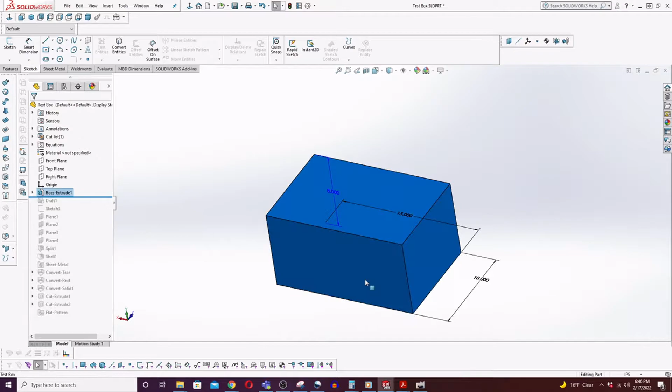So the first method I used was with a 3D solid that's been converted into a sheet metal part, and I'm just going to show you in this part how to do that. What I started with was a box, just a standard extrude. I picked some basic dimensions, 10 by 15 by 8. I drafted those faces on the side to create the prism feature, and then I created a sketch and some planes at the corners so that I could intersect the edges, intersect with those vertices, and then split away all those corners to create the prism.

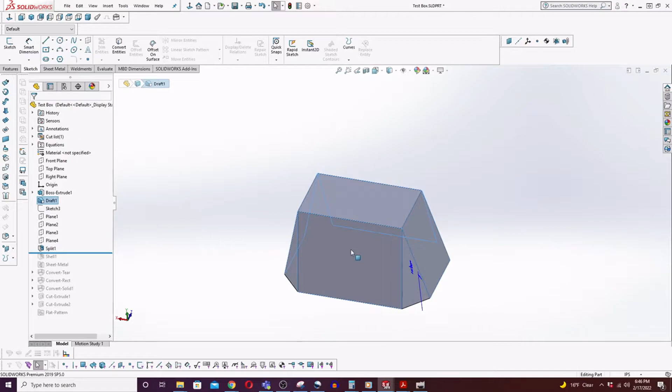Now, something to be aware of is that when you do a draft, you can select the draft out of the tree and double-click it to get to the edit of the angle. But what you can't do is select the drafted faces to edit the angle. So if you want to create drafted faces that you want to edit, maybe the offset, not so much the angle, such as controlling the distance here horizontally from this lower edge, then you'd want to do an extrude cut instead.

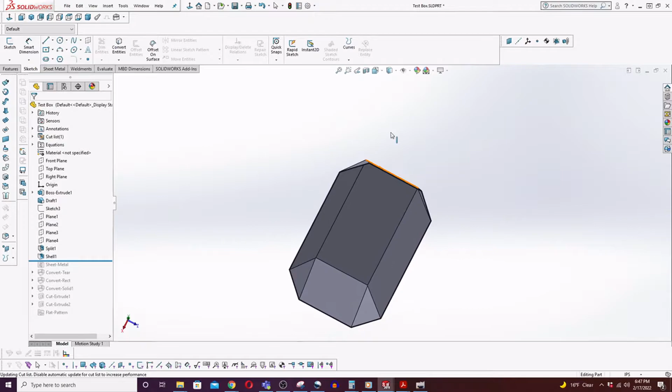Then I shelled it, and I only shelled it because I like to make sure that my models that I convert from 3D to sheet metal actually look somewhat like sheet metal parts before I actually convert them. Technically, I wouldn't have to do the shell, I could just leave it alone. And then I do my sheet metal conversion.

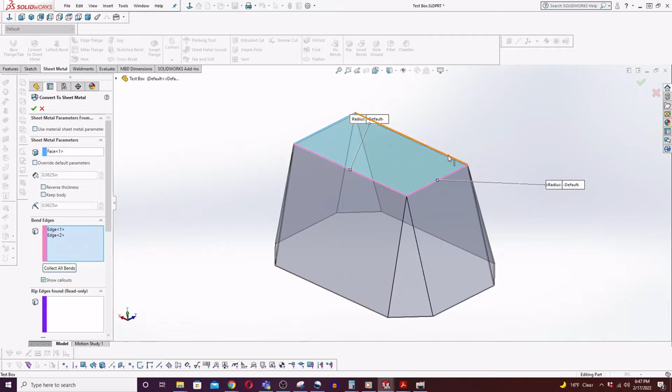Now, in this particular part, I haven't done it yet, so I just come over to the sheet metal workbench, convert to sheet metal, and you grab your top surface that's fixed, and then you come in and grab your bend edges. In this case, it'd be all the top edges. You want to make sure. Now, the downside to shelling it is if I accidentally grab the inside edge, it'll give me an error, so you've got to make sure that all your external edges are selected.

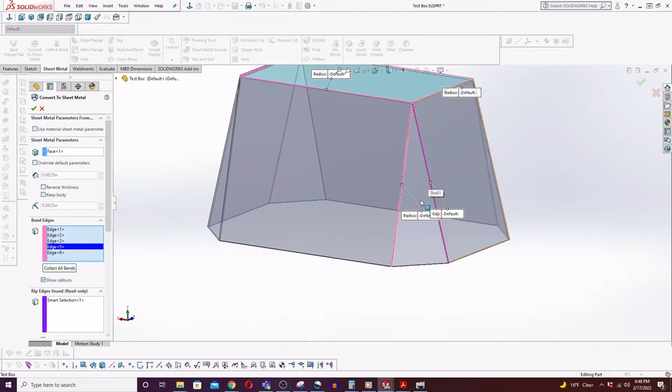And then from there, I have to make a decision: am I going to use the side flange for my bend for the triangle, or am I going to use my end flange? So I'll show you both. Automatically, SolidWorks identifies that there is an exclusivity here where this edge cannot be included as a radius. It's a gap, so that's going to be your rip edge, and it's populated in my rip edges down here.

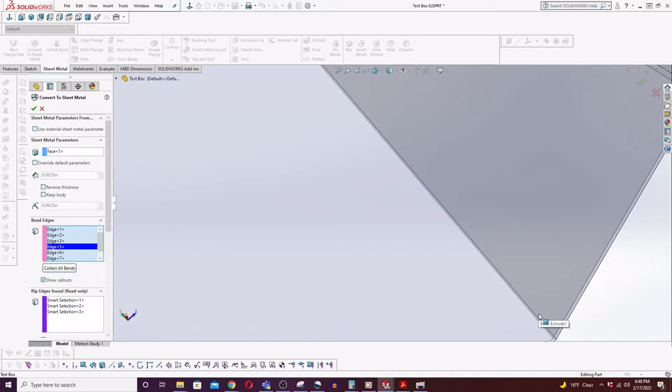So continue to move around. On this side, I'm going to do it where I've got the side flange. Here I'm going to go ahead and grab my end flange to be my bent feature. And then from here, obviously all the surfaces highlight. From this point, I can actually come in here and control a few other features, like the gap on my corner defaults.

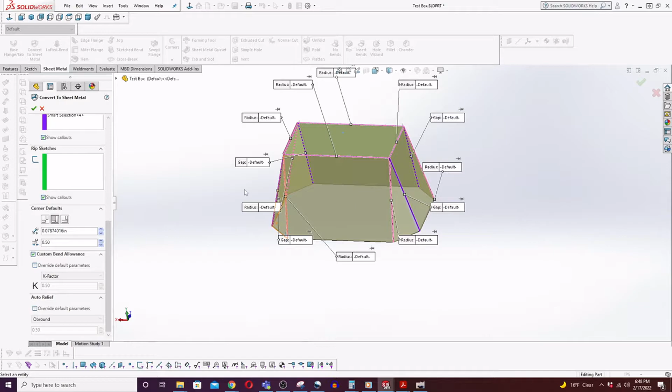If these were 90-degree bends, then I could start playing around with my overlaps and underlaps. The only reason I'm not going to do that here is because what will happen is it'll actually extend my sheet metal part past, and it probably won't preview it for me. Oh, there it goes. It shows me. There it goes.

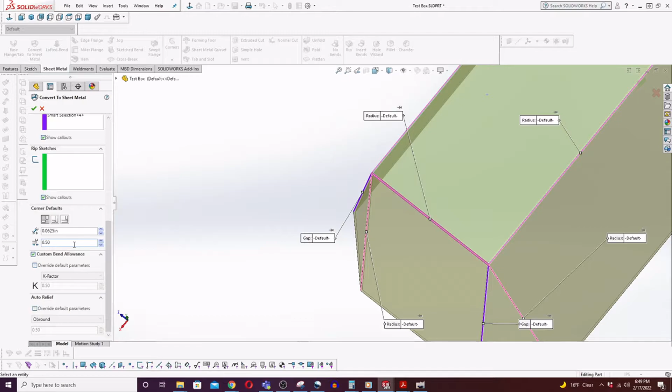It gives me a preview there where it's funky, it's overlapping pretty bad. So I'll just do the open butt joint, and then I'll give it a distance. This is basically 2 millimeters, but I can also just do the thickness of the sheet metal. The gap, I like to use either the thickness of the sheet metal or roughly half.

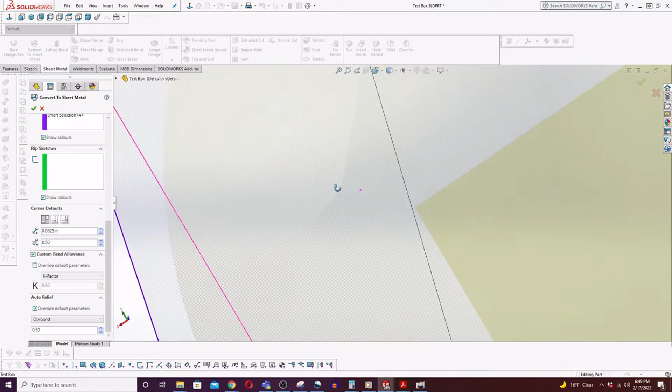And then my overlap, that's up to the individual engineer or designer. I'm going to override my default parameters for my relief. If I do an Obround, I get this nice curved feature in the corner. Problem is, if you rotate in here, you can actually see a little bit where the corner, ever so faintly, the bend radii actually interfere.

And it's because of the nature of how we're developing this model, where it's got 75-degree bends instead of 90-degree bends. I could play around with it. There's actually a lot of different ways to fix this, but changing this ratio doesn't really fix it.

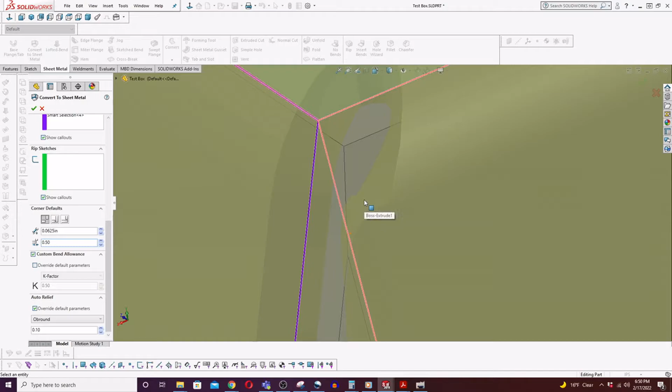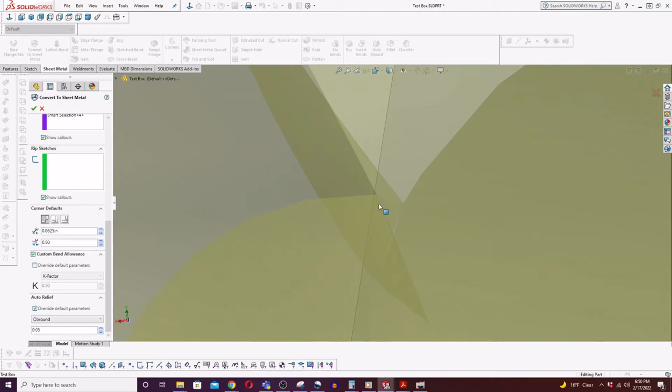You can bring it all the way down to 0.1, and even then you'll see it brings it back, but it doesn't fix it. It still leaves just a little bit of interference in that bend. Even if I were to do 0.01, 0.05, I should have known that. So 0.05, and I still have an issue where the bend radii are touching each other. And ultimately, I'll just bring this back up to 0.5, and I'll get this error.

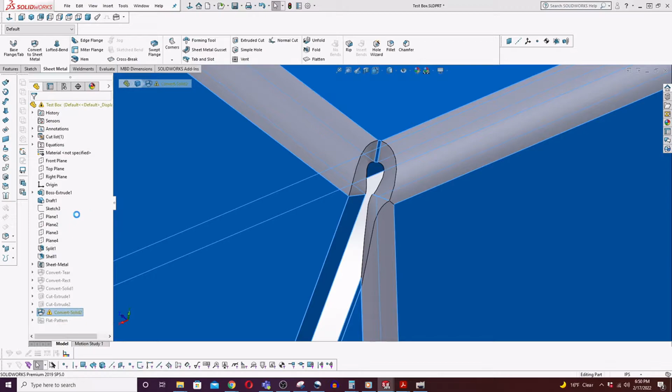And it's just telling me that the bend faces are fused together. It's not the end of the world. I actually can show you how I did fix it, so where the model does work. Or what you can do is come in here, and I've built 3 different versions of this configuration with an Obround, a rectangle, and a tear.

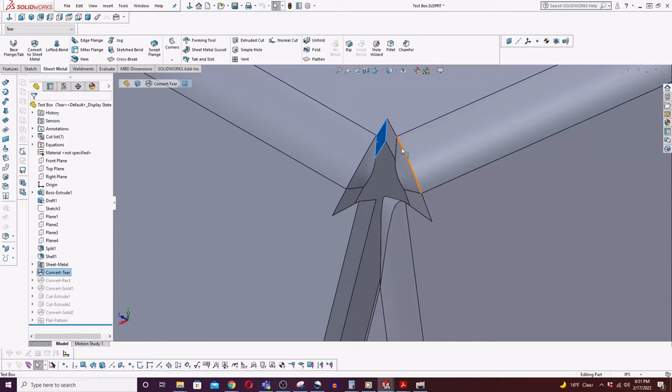So if I do a tear, what happens is it actually rips apart the sheet metal, and for whatever reason Solidworks doesn't have enough complexity built into this feature to know to put a radius in these corners or anything like that. You can go into the model and create little base flange tabs where you finish out these features, but that becomes pretty time consuming. You get a very similar type of corner feature with the rectangular. It's just a little bit less pronounced, but same issue.

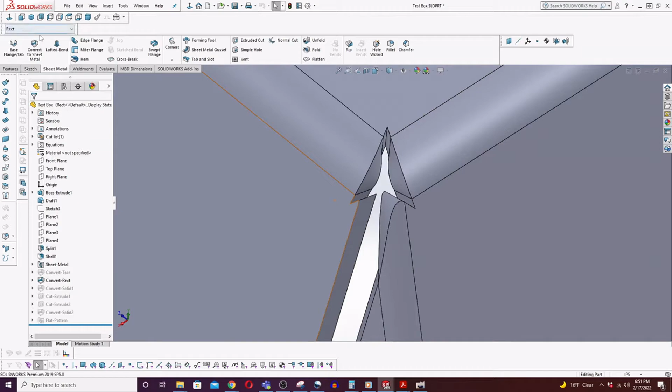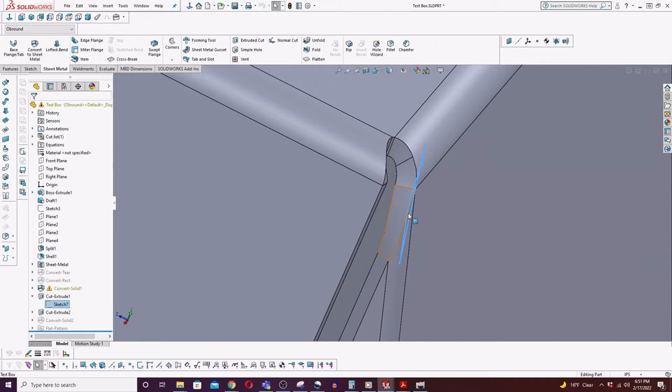And then if you do the Obround, one way that you fix it is you do a cut feature where you come in and actually project the geometry of the interfering bends, and then extrude them past and leave behind the other faces. And then now, at least by doing it this way, I can flatten my part. Otherwise, I wouldn't be able to.

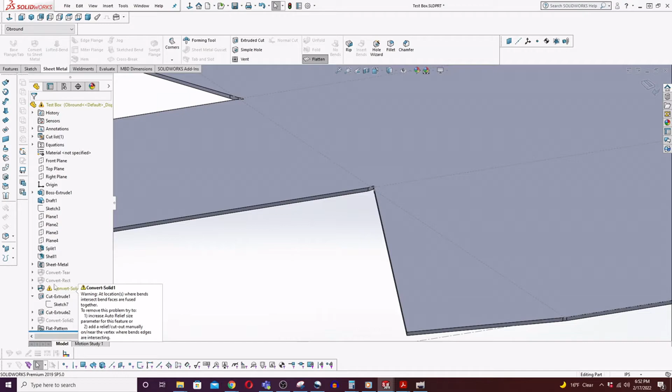Now, the warning still exists. Notice it's a warning, not an actual failure. It's just telling you, hey, it can cause problems. So from there, that's one way to create a part like this.

The only thing I don't like about this is whenever you select on a converted solid and try to edit the underlying features, you can't. It'll just kick you back to the conversion level. Everything before that is inaccessible from the 3D space. You have to go back to the tree to select it.

So if you have a bunch of different drafts, or a bunch of different features like holes and things like that, you don't want to put those in until you've converted it to sheet metal, which can be a problem. I prefer to build it directly as a sheet metal part.

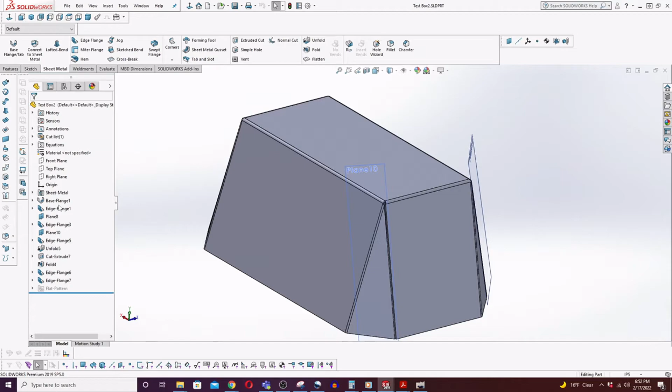And a sheet metal part, I've done it a couple different ways. First off, I start with the flat base flange, and then I did an edge flange. Here, they're all just at 75 degrees. It's the same length, and then what I did was make sure that the flange position is set to intersect, bending from a virtual sharp.

And the reason is because I want to make sure that the outside faces, the intersection of those faces, is the same as the dimensions of the original flat.

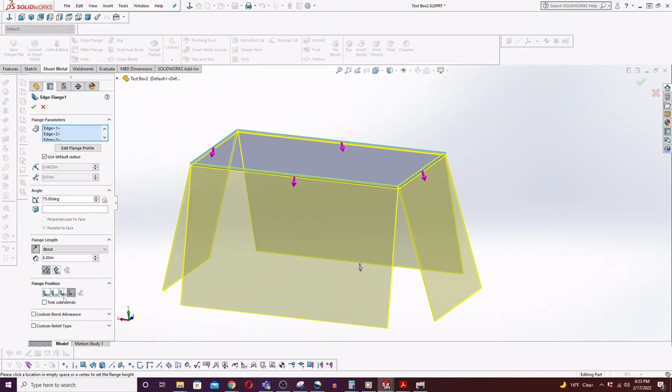If I would have done a material inside or outside, or any of these other options, it would have changed things. They tend to be a little funky when you move away from a 90-degree bend.

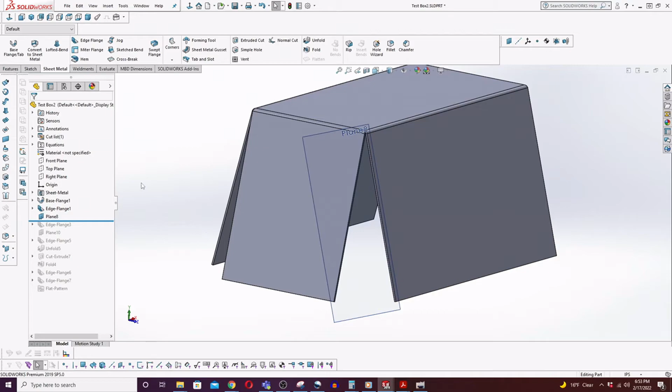From there, I came in, dropped a plane on the corner, and then measured that plane to the outside face, which gives me an angle, roughly 44 degrees. In reality, no sheet metal shop is going to bend it to 44.007, so what I did was just form it at 44 degrees.

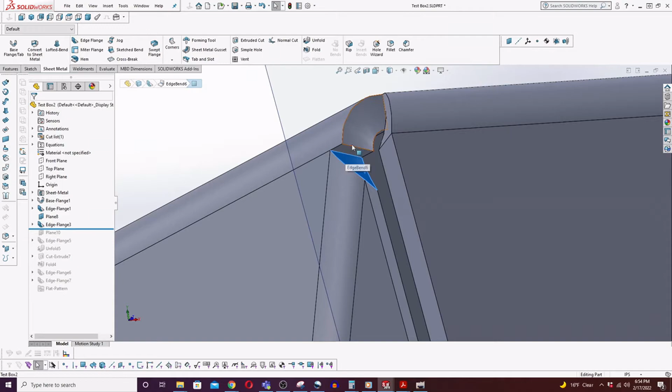In this particular case, I bent it from the end flange, not from the side flange. The only issue is here, the bend doesn't extend all the way up to the other bend, and that's just because of the interference. It has to have relief, because you can't have those two bends interfering with each other or touching.

You could have a rip feature, but generally speaking, you want to have a gap. In reality, when you make this, you'd want to have a clearance between these features.

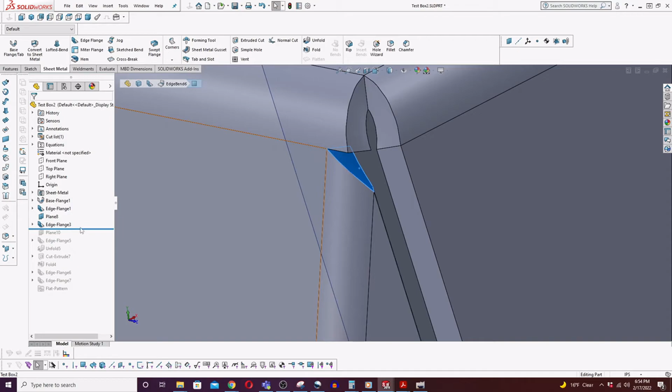The way that I solved that was I actually unfolded the part. I came in on the other corner here, took a cut feature, drew a sketch, projected the edges, cut it down, and then folded it back up, and now I have a corner that actually works.

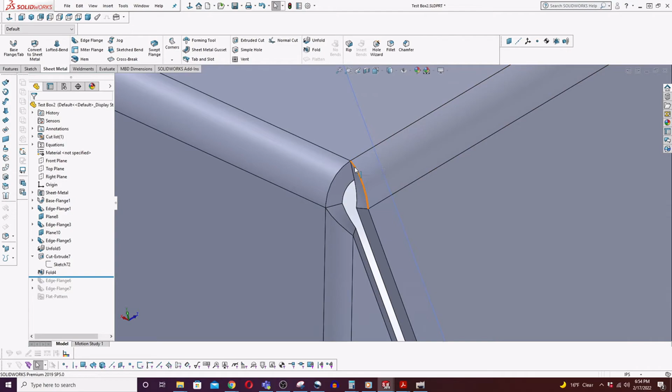If this was not going to be a welded corner, I would have put a radius relief into the top flat, just so there's no propagation of cracks. In this particular one, it's going to be welded, so I'm not worried about it. No big deal, it's just a demonstration.

From there, your part is pretty close to being done. At any point in here, I can flatten it, unfold it, etc.

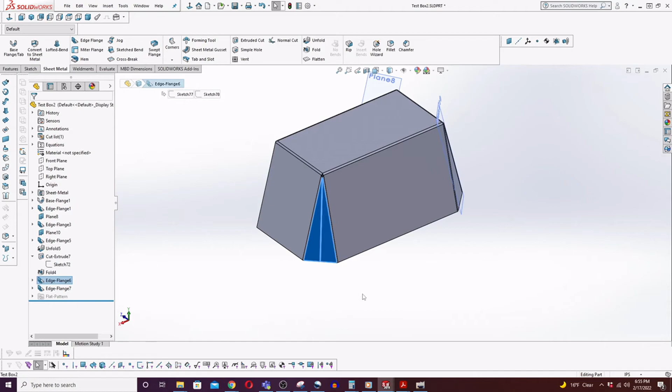The last method I was going to show is basically like a French door effect, where you could take an edge flange all in one shot. I didn't really talk about it in these other ones, but when you select your edge, you come in and edit the flange profile. Normally it would come out perpendicular to the base edge, which is the projection of the base geometry, and then it would be a rectangle.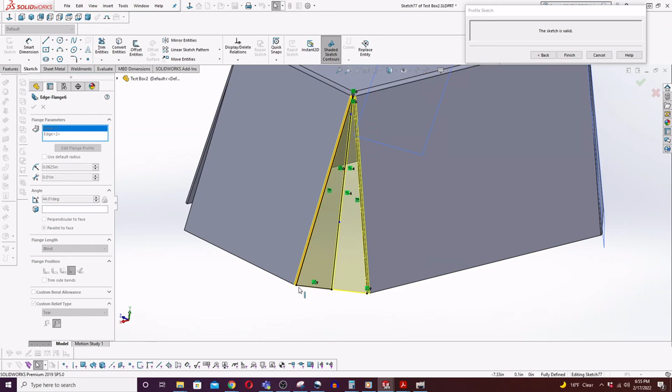Here what I've done is I've drawn a new line in its place and an intersecting line, or a line in the middle, like a symmetry. Then I have a line here that's actually a symmetry between the two corners. From there, I repeated it for the other edge and moved on with life, and I get this nice clean effect.

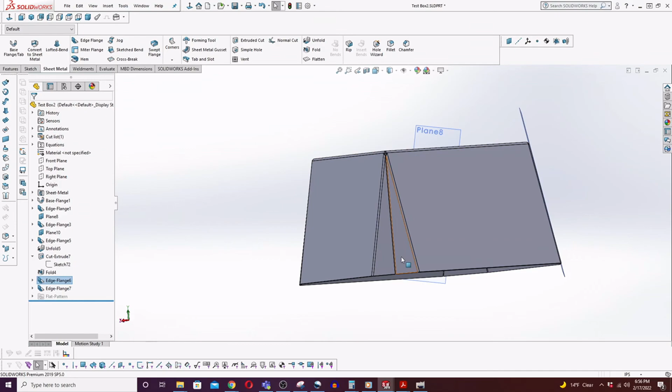This makes it nice in that you have a known radius for your bend, but it makes it more difficult because now you've got a bead right down the middle. So if a guy is going to try to grind that smooth with a flap disc or something, it's going to be much more difficult to get this part clean versus if you were to do it in the corner and then just radius it with a belt sander or something.

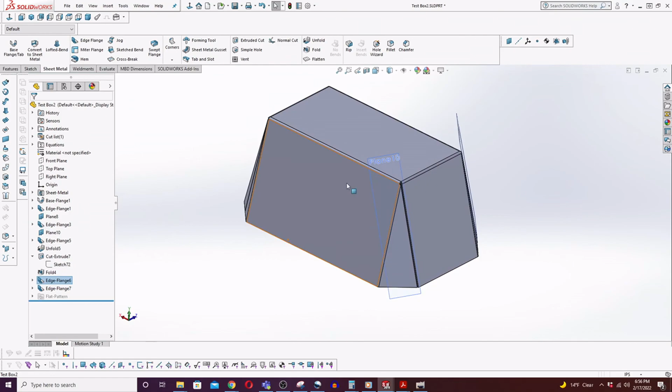So that's kind of the methodology I would use for modeling a part like this. The reason I like building in sheet metal directly is because now when I select any of those features, I get directly to the feature I built, and that way, anything I do, I'm going directly to it. I'm not going back to the conversion.